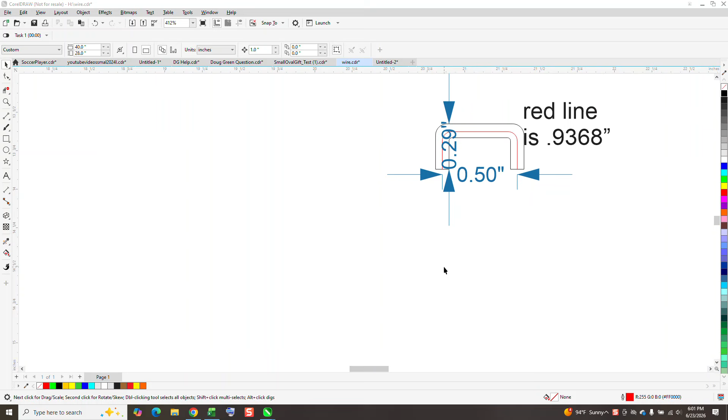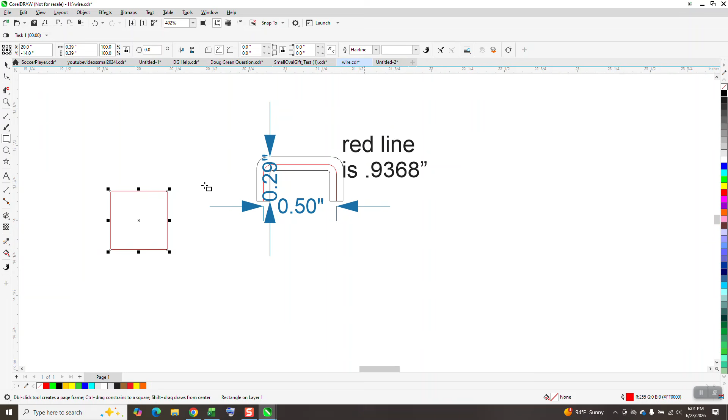So I'm going to draw a square, hit P to put it in the center of the page, and make it 0.5 inches wide. Now what I'm going to do is take it, and with my rounded corners, I could unlock the ratio and just do the top, but I'm going to delete.

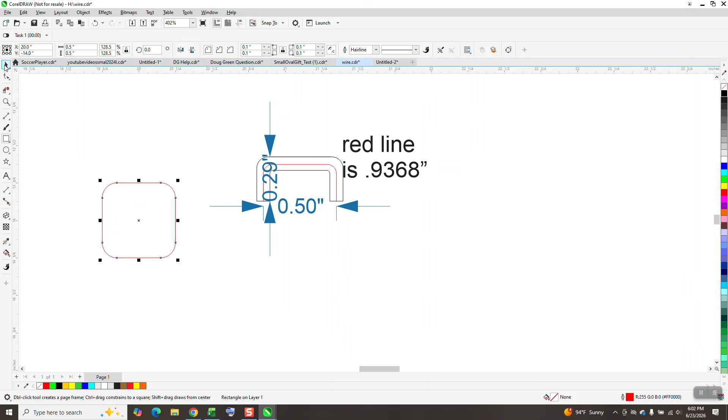This is the only part I really don't understand how to get that, if it has to be that perfect. But now I'm going to take a 2-point line, hit P, and then delete this. So this isn't going to help too many people. Now, this is a half inch line and 0.29 tall, or 0.25.

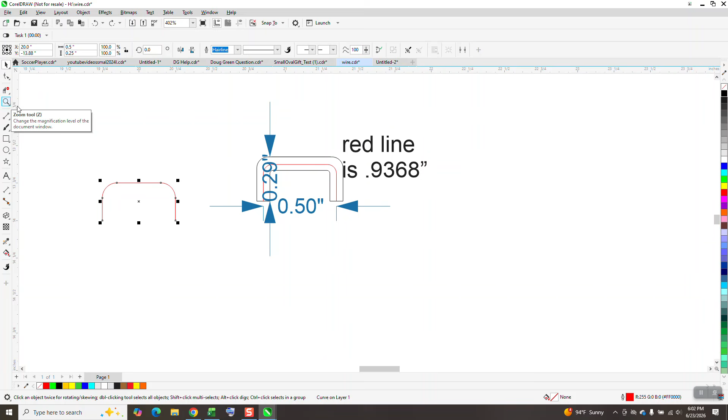So we could actually unlock our ratio and make this 0.3. Now that made the corners a little off. Let's back up here. One way we could do it... well, that'll throw in another little trick.

Let's set my nudge factor. If you look, it's 0.25. I'm going to set my nudge factor to 0.05, and take my shape tool, grab both these nodes, and nudge them down. So now if you look, it's 0.3, which is in the realm of it. And really, that's the length of the line.

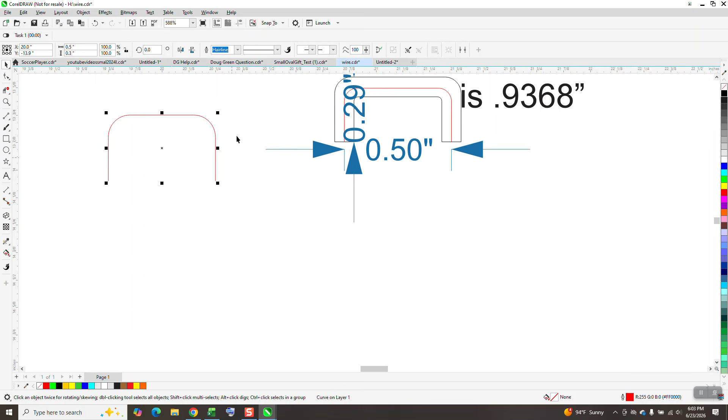If we go up to, without doing the other stuff, we're going to go to Dockers, Properties. And right here, because it's a curve, now it's 1.01 because I'm a little bit long. I don't think the other thing had any measurements, but we could make it shorter.

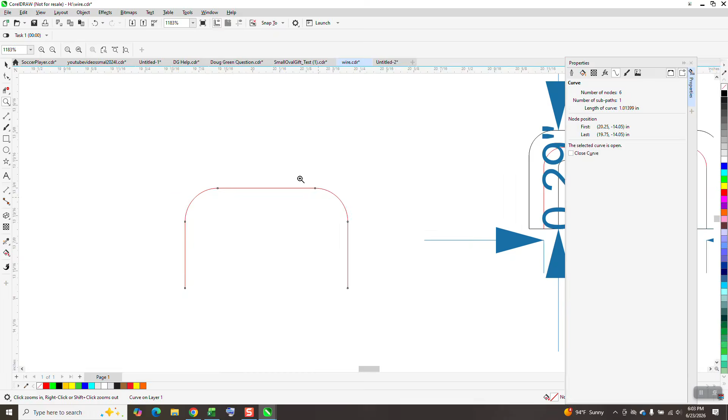If you look, it's hard. It's not something easy. You know what? Let's back up to make it shorter. And then let's measure this line, and you see it's 0.91, but it is that half inch wide, and it's within the tolerance.

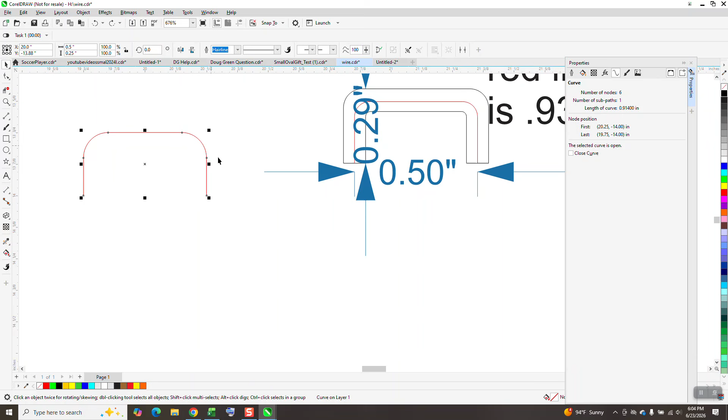There's a lot of things we could do, and just to make it look like the item, we can go to Effects and Contour. We're going to contour the outside 0.5, and we get that. Now I'm actually going to go square corners, and we get that.

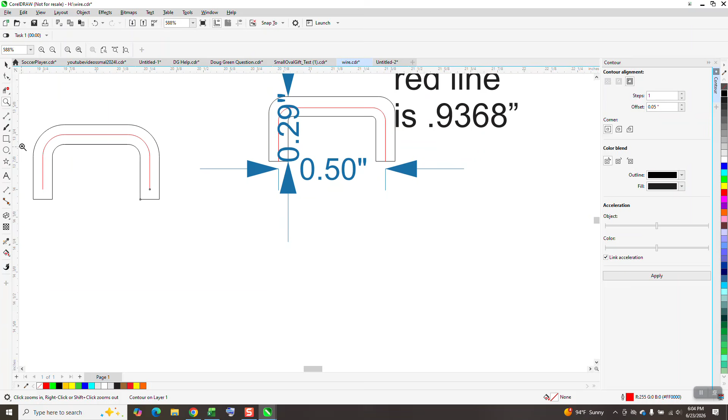Now my line isn't to that area, but if you remember, we nudged that down. So we could do the same thing with this. This is a contour, so I need to go to Object and break the contour apart. Then I can grab these nodes and nudge them up.

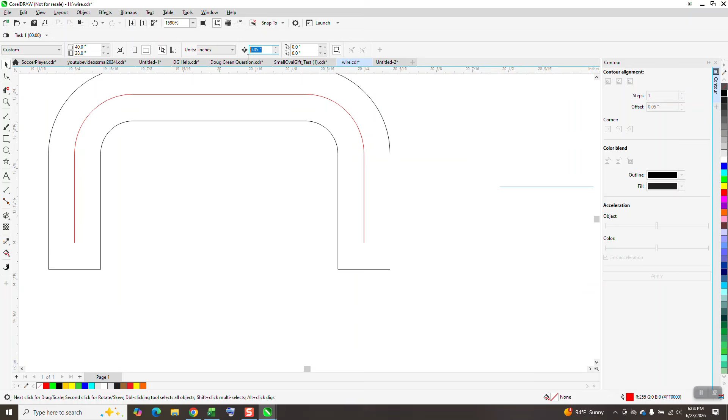Maybe it's 0.05. Yeah, I'm holding down the control button. There we go, nudge these up.

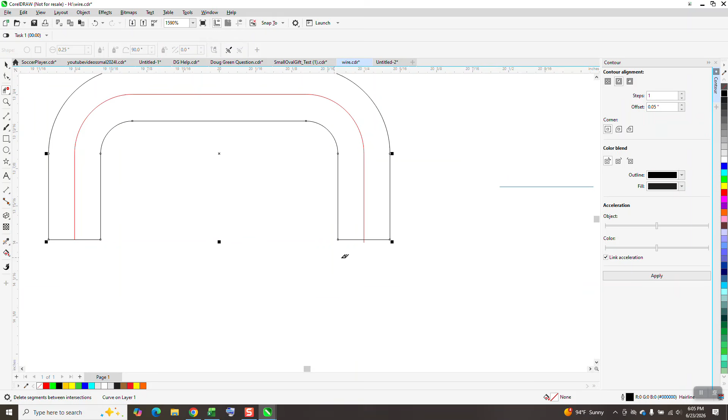Now I'm actually a little bit long. I'm just going to go ahead and cut that away. And to make it look more like the drawing, if you look, this is a dash line, and it's actually got some other parts in there.

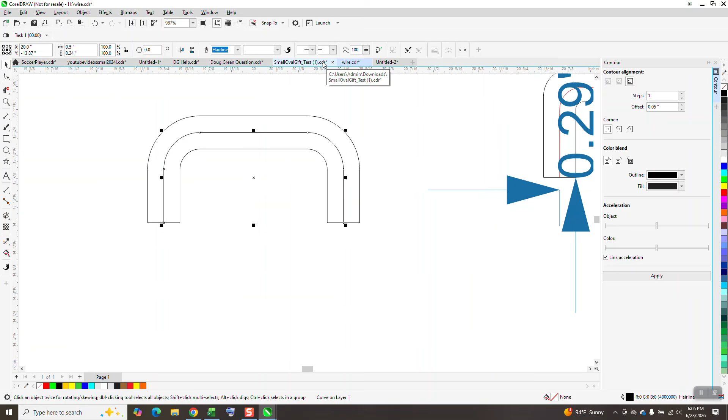We could make it a dash line. I don't really know what this is for, but let's take this line, go ahead and make it black, and go up to, well, hit F12 on your keyboard and get some dashes. You could make your own dashes. You see, that looks pretty good.

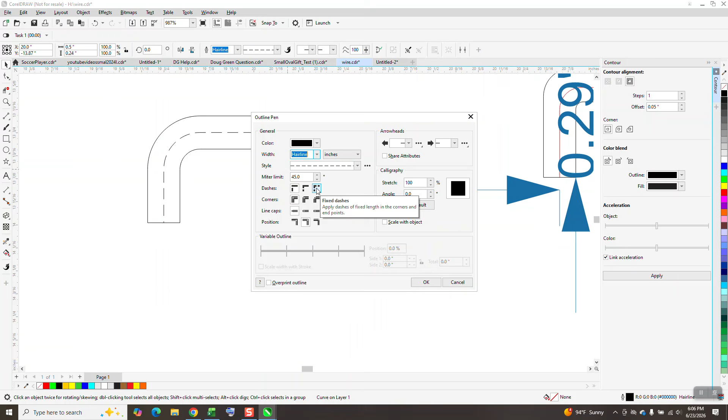It's not perfect. Let's hit F12 again on the keyboard and go right here to fixed dashes. Hit OK, and now they're even. I don't know what he's really doing with this. But if we take that line and go up to Windows, Dockers, and Properties, and get the little squiggly line...

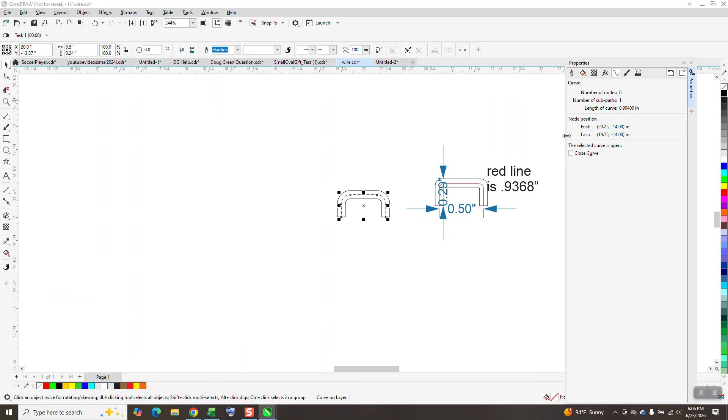See, now we're at 0.904. I don't, there's no other measurement like that. Now we could put these things in. I don't know, that would be pretty easy. When I sent him this file, he couldn't really find this because it's so small.

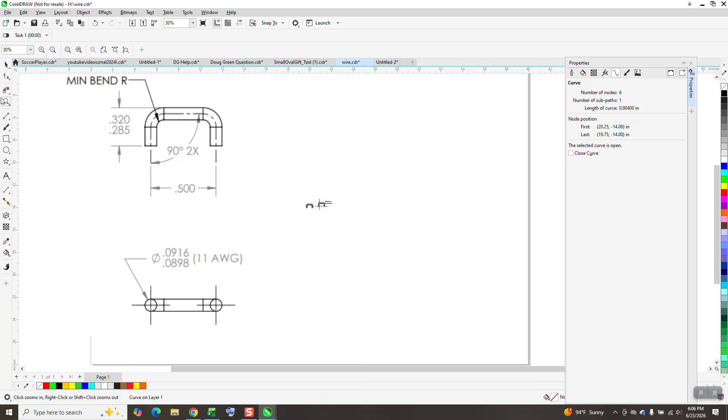This is what he sent me. If you look, that's right before the turns on both of them. Let's see if we can do that. Let's take this item, get this, see, and we got nodes. That's going to help us a lot.

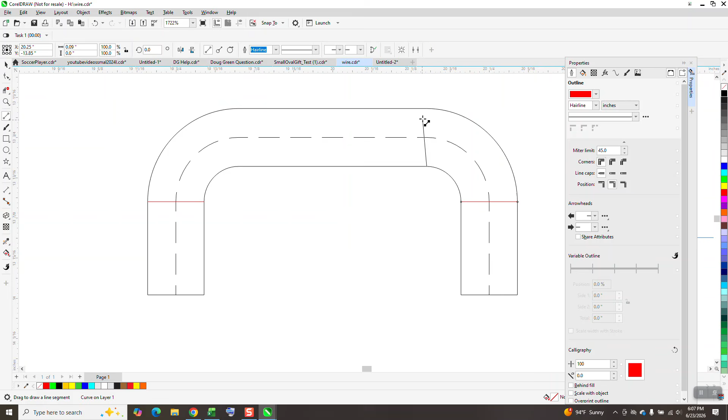Let's take a 2-point line and go from that node to that node, that node to that node. Whoop, I'm off a little bit. Go from node to node, node to node, node to node.

Let's make those lines black. I'm going to get rid of that. And let's make them a little bit thicker than a hairline. That's maybe too thick.

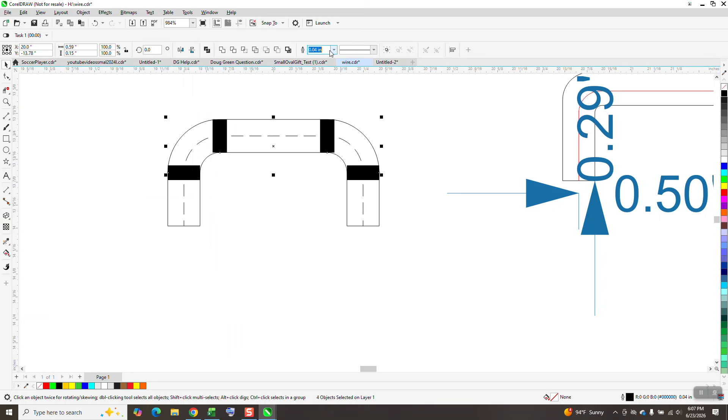Let's go 0.04. What was the first number? 0.004. So let's go 0.004. That looks a little better.

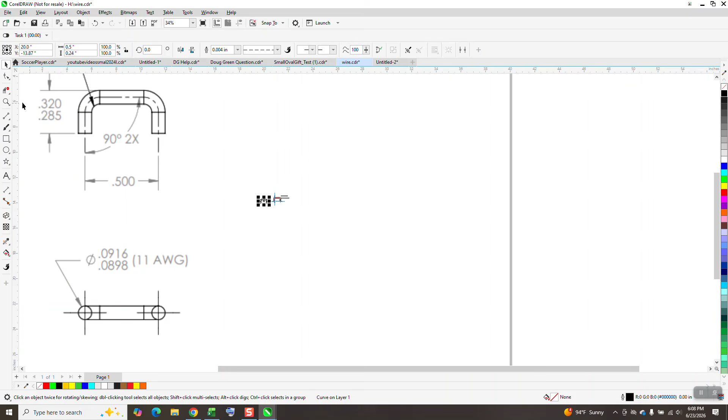We can make this line 0.004. And then we can make this dash line 0.004. So it looks more like the item, per se.

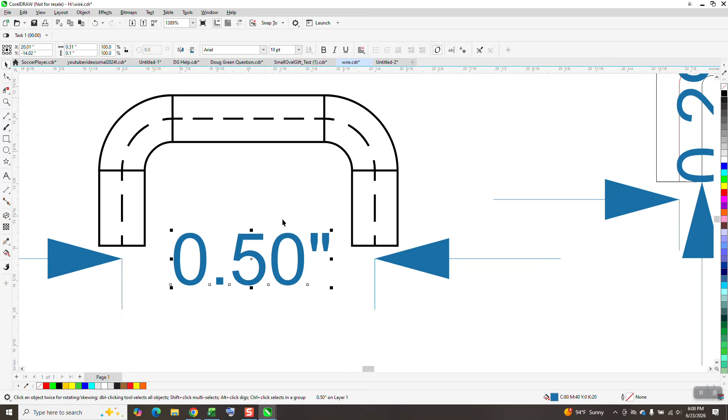And then what I would, if he has to do this, we can take the parallel dimension tool and go from that node to that node, and look, now we're at, my text is too big. So click off that and go like 10 points. And see our text is smaller. That's about the only other, the...

0.29 is the top to the top. And let's see what we got. So let's go, it's going to be hard to get the top. So I'm going to take a guideline and have it snap to that node. Turn on my guideline, and see I've got a couple there.

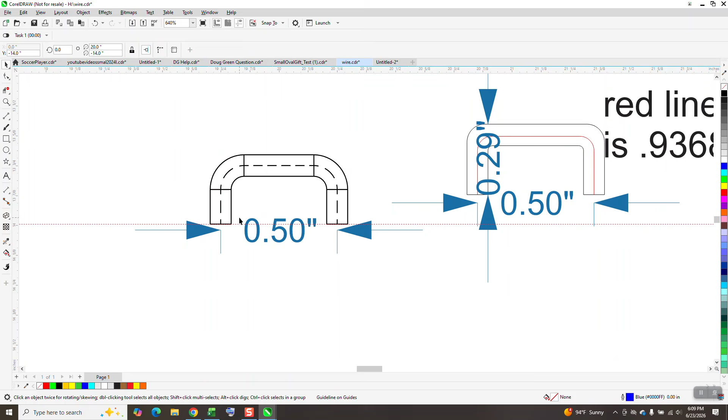So I'm going to delete those. Bring in a guideline and have it snap to that area. Because now I can measure from here up. So let's get the parallel dimension tool.

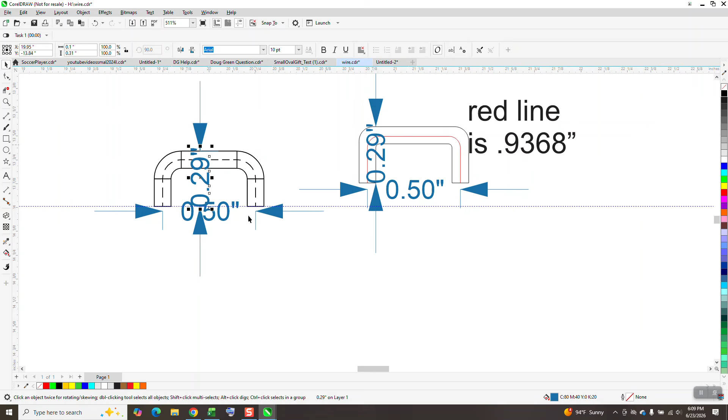And I'm not 100% sure this is the way to do it. You see we're at 0.29. And normally I'm not drawing something so small. So it looks better. And then you could always move that out of the way.